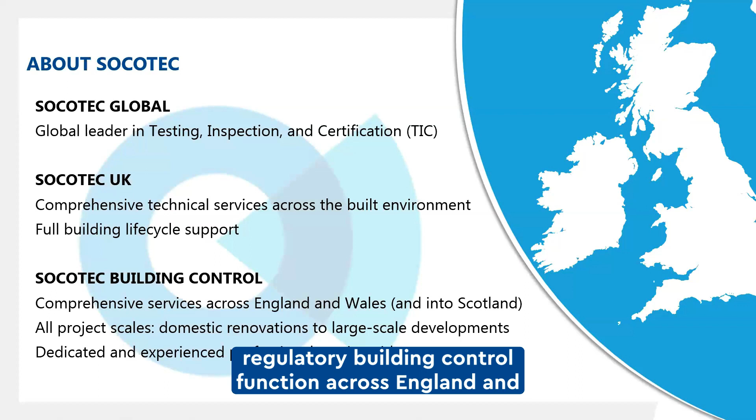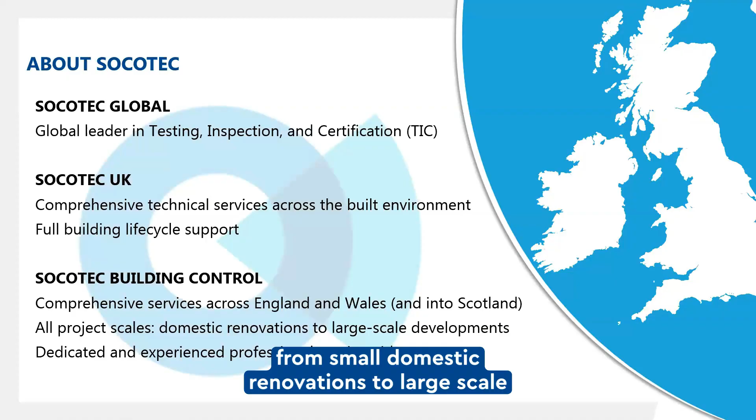At Socotec Building Control, we provide a comprehensive regulatory building control function across England and Wales, working with clients, designers, contractors and developers, providing oversight on projects of all scales, from small domestic renovations to large-scale commercial and residential developments. We also provide additional services, working as part of the multidisciplinary teams with the Building Safety Regulator, and in other sectors such as the Ministry of Defence and Ministry of Justice, reaching beyond England and Wales into Scotland. Our team of dedicated professionals operate nationwide, bringing extensive expertise and a risk-based approach to building control oversight.

Here's what we'll cover today. We'll begin by understanding why Grenfell triggered such profound change, then move through the key legislative developments and the current regulatory framework. We'll examine the various roles within the new system, focusing solely on non-HRB projects. We'll then discuss the fundamental shift in building control's role and the new registration requirements for building control professionals. Finally, we'll focus on practical guidance for effective engagement and how you can proactively demonstrate compliance. We'll conclude with a live Q&A.

The Grenfell Tower tragedy on the 14th of June 2017, which claimed 72 lives, exposed fundamental failings in our building safety system. Dame Judith Hackitt's independent review, published in May 2018, concluded that the system was not fit for purpose. Her report identified a fragmented regulatory landscape, insufficient oversight, a race to the bottom on building standards, inadequate competence across the industry, and worryingly, a culture where non-compliance had become normalised. These findings necessitated nothing less than a complete overhaul of the building control system. While the focus has naturally been on high-rise residential buildings, the review's findings had implications for all building types, and the legislative response has affected projects across the board.

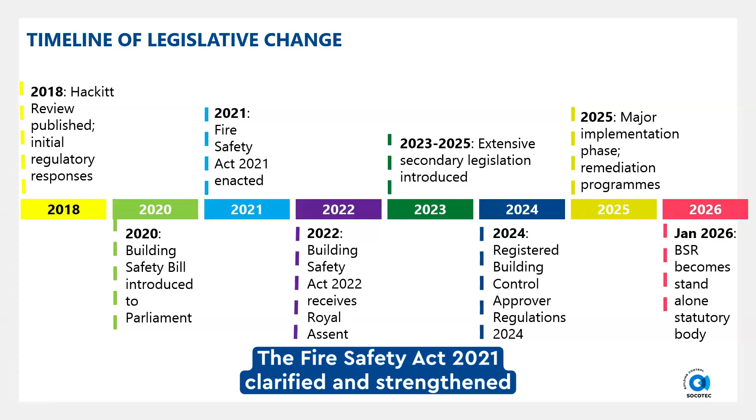The industry has seen significant change to legislation over the past few years. So let's take a look now at some of the key changes impacting the industry. We will start by looking at the timeline of change. Following the 2018 Hackitt Review, the government introduced the Building Safety Bill in 2020. The Fire Safety Act 2021 clarified and strengthened provisions under the Regulatory Reform (Fire Safety) Order 2005. The landmark Building Safety Act 2022 received royal assent in April of 2022, creating the legal framework for the new regime. From 2023 and into 2025, extensive secondary legislation was introduced to operationalise these changes.

In 2024, the Registered Building Control Approver Regulations 2024 came into force, fundamentally changing how private sector building control operates. Throughout 2025, we saw major implementation and significant remediation programs for unsafe cladding. Most recently, on the 27th of January 2026, the Building Safety Regulator became an independent statutory body, moving from its previous position within the Health and Safety Executive. This represents a significant step towards establishing a unified construction regulator.

The Building Safety Act 2022 is the cornerstone of the new regime. While it introduced the specific higher risk building requirements such as the gateway system, mandatory occurrence reporting for safety issues, and mandatory digital record keeping known as the Golden Thread, it also brought changes affecting all building work.

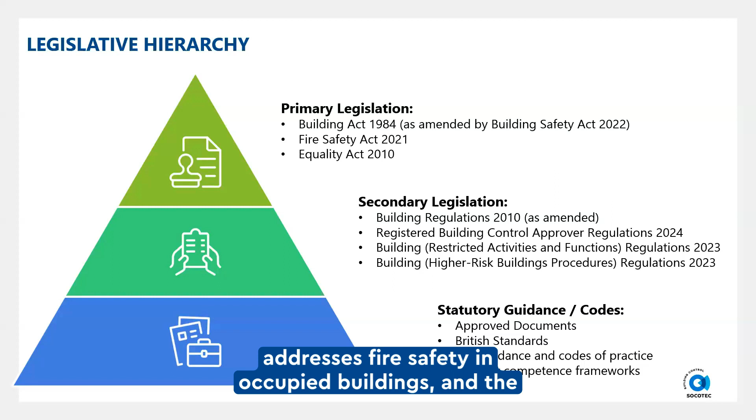Understanding the legislative hierarchy is crucial for compliance. At the top, we have primary legislation, Acts of Parliament. The Building Act, now amended by the Building Safety Act, provides the overarching legal framework. Other examples include the Fire Safety Act, which addresses fire safety in occupied buildings, and the Equality Act, which aims to protect people against discrimination based on protected characteristics.

Secondary legislation sits beneath this. The building regulations, which have been amended multiple times, set out the technical standards relating to building work and procedural regulations to be followed specifically for local authorities, whilst the registered building control approver regulations govern private approved bodies who carry out building control services and how they must operate, with other supplementary regulations such as the Building Restricted Activities and Functions Regulations expanding on measures introduced by the Building Safety Act.

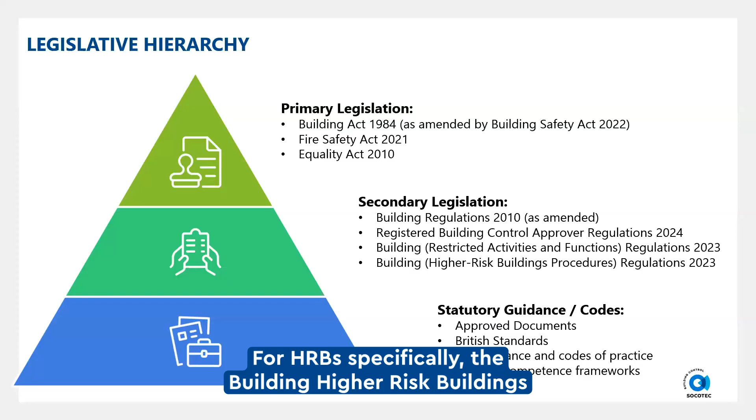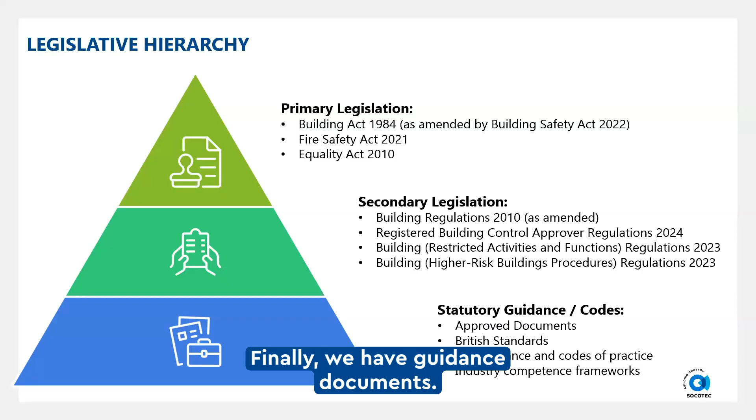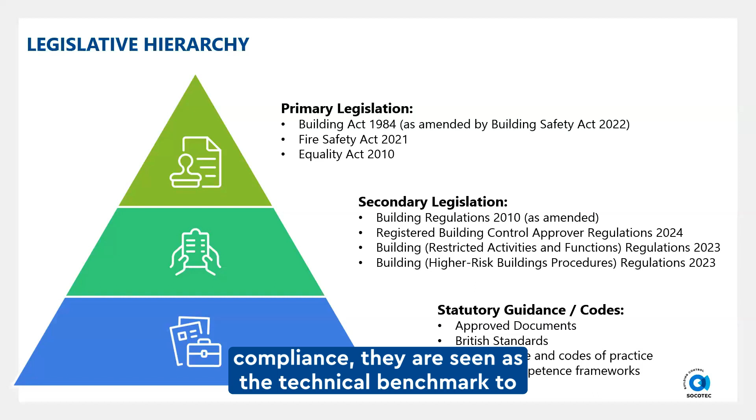For HRBs specifically, the Building Higher Risk Buildings Procedures Regulations detail the gateway process and other procedural requirements for buildings of this type. Finally, we have guidance documents. The approved documents provide statutory approved guidance on meeting regulatory requirements. And though they're not the only way to demonstrate compliance, they are seen as the technical benchmark to demonstrate compliance with functional requirements, supported by relevant British standards which are signposted as part of the approved guidance.

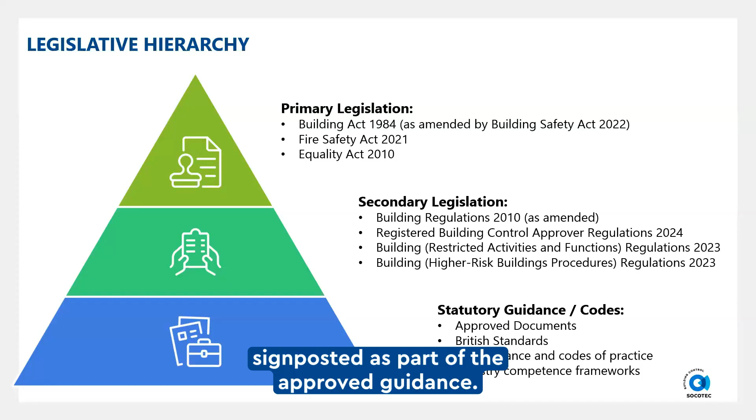The Building Safety Regulator issues its own guidance and codes of practice, and industry has developed competence frameworks to support practitioners and other similar guidance documents. A significant change brought in by the new legislation is regarding roles of those working within the construction industry and their responsibilities in relation to projects. Let's now spend some time reviewing these roles and responsibilities.

The Building Safety Regulator represents one of the most significant innovations in the new system. Initially established within the Health and Safety Executive in 2022, as of 27th of January 2026, it has moved to become an arm's-length body under the Ministry of Housing, Communities and Local Government. For higher risk buildings, the BSR has direct oversight through the Gateway Approval System. However, its role extends far beyond HRBs.

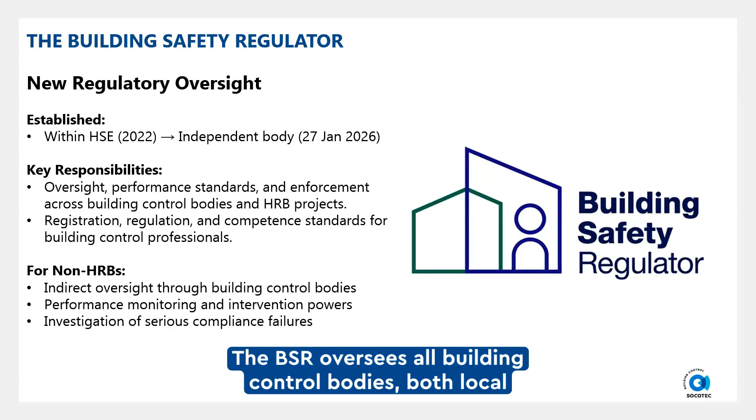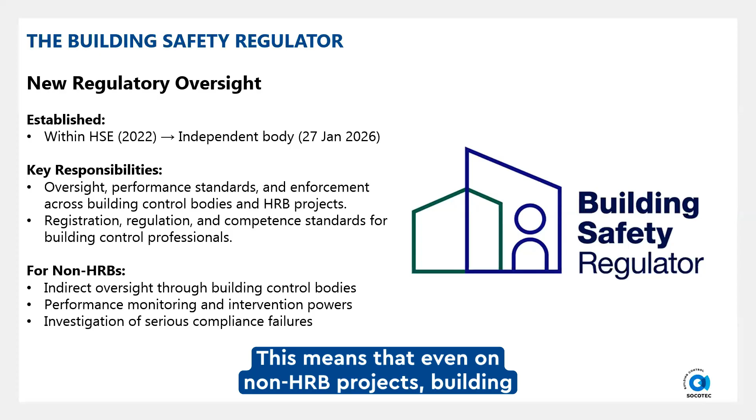The BSR oversees all building control bodies, both local authority and registered building control approvers. It registers and regulates building control professionals, sets performance standards, and holds enforcement powers. For non-HRB projects, which is our focus today, the BSR's oversight is indirect, but nonetheless significant. It monitors the performance of building control bodies and has intervention powers where serious compliance failures are identified. This means that even on non-HRB projects, building control decisions are now subject to greater scrutiny and accountability than ever before.

Now we move into the specific requirements for non-HRB projects, which will form the focus of the remainder of this webinar. The concept of duty holders is central to the new regime, and it's essential to understand who these parties are and what their roles entail. For non-HRB projects, the key duty holders under the building regulations are the client, who commissions the work, the principal designer for building regulations purposes, and the principal contractor for building regulations purposes. And as part of the building control process, these key duty holders are expected to make statements about the works and to confirm their specific duties have been undertaken.

In addition, any individual designers who may work under the principal designer and any individual contractors who may work under the principal contractor now have defined responsibilities as part of the building regulations. It's crucial to understand that the principal designer and principal contractor roles under the building regulations are distinct from the similar named roles under the CDM regulations. Whilst the same organisation may hold both roles, the responsibilities are different and serve different purposes. We'll explore this distinction in detail.

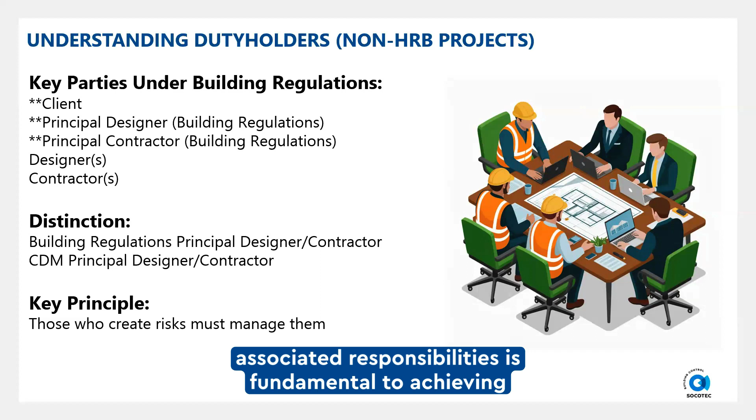The underlying principle applies across all projects. Those who create risk must manage them. Understanding your specific duty holder role and its associated responsibilities is fundamental to achieving compliance and owning responsibility. Let's focus on the client's role in non-HRB projects, as this often determines project success. As outlined in legislation, clients must ensure adequate time and resources are allocated for compliance. This isn't something that can be value engineered away, given that it is their legal duty.

Clients must appoint competent duty holders, including the principal designer and principal contractor, in order to satisfy the legislation, and information regarding duty holders will be required to complete the building control process. Critically, clients must ensure building control is appointed at a suitable point in the project, ideally before design work is concluded and certainly in advance of work starting on site.

This timely appointment is essential because building control's role is to oversee the process and should not be seen simply to rubber stamp completed designs. Clients must ensure coordination between all parties. Building projects may involve multiple specialists, and someone must ensure they are all working towards the same compliant outcome. Clients must maintain oversight of building control compliance throughout the project, not just at the end.

Documentation must be retained and should generally follow the golden thread principle to ensure the information can be used effectively to inform future development. Finally, clients must make suitable arrangements for managing changes, which are inevitable on most projects. The key question every client should ask is, do I have the right people doing the right things at the right time? If you can't confidently answer yes, you have a compliance risk.

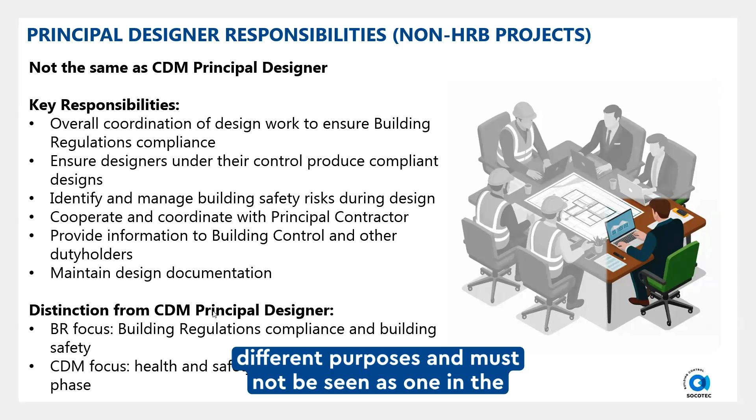Similar to the PD role, the principal contractor role under the building regulations is distinct from the CDM principal contractor. Again, the same organisation may hold both appointments, but the responsibilities differ. The building regulations principal contractor has overall coordination responsibility for construction work to ensure building regulations compliance. They must ensure that all contractors and subcontractors working under their control execute work in accordance with approved plans and specifications and comply with building regulations.

The principal contractor must manage building safety risks during construction, ensuring that what's being built will be safe for future users. They must cooperate and coordinate with the principal designer, particularly when site conditions or buildability issues require design modifications. Crucially, the principal contractor must liaise with building control regarding inspections and compliance verification. They must facilitate inspections, provide information, and ensure work is available for inspection at the appropriate stages. They must maintain as-built records and documentation, capturing any departures from the approved design.

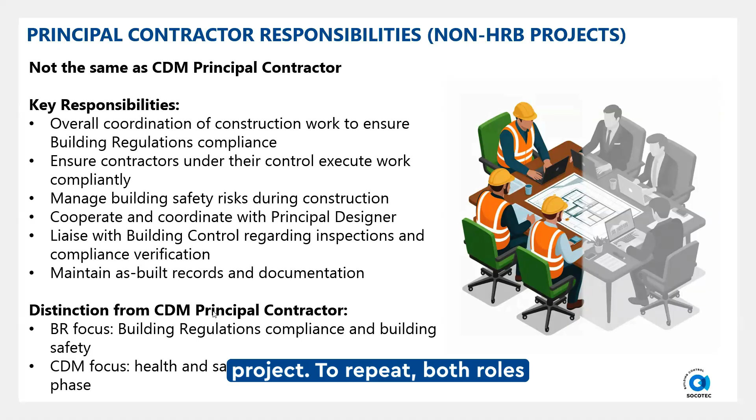The distinction mirrors that for principal designers. The Building Regulations Principal Contractor focuses on building regulations compliance and building safety for future users. The CDM Principal Contractor focuses on health and safety during the construction phase of the project. To repeat, both roles are essential. Both are legal requirements, but they address different aspects of construction safety.

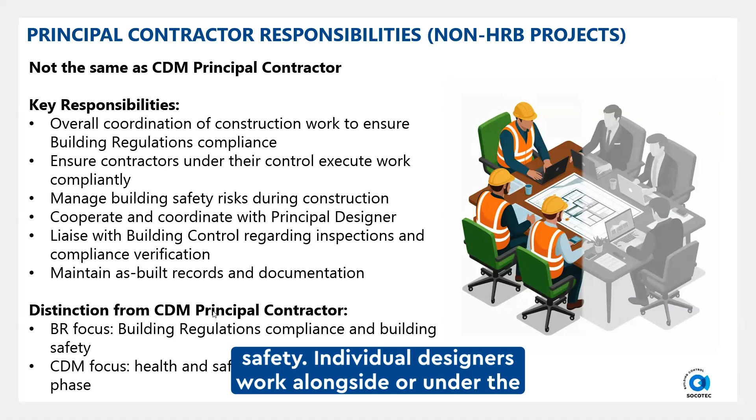Individual designers work alongside or under the coordination of the principal designer. The definition of designer is broad. It's anyone who prepares or modifies designs, or specifies materials, products, or systems. This includes architects, engineers, specialist subcontractors, and even contractors who make design decisions.

Individual designers must design to comply with building regulations from the outset. They must identify and manage building safety risks within their area of design responsibility. They must cooperate with the principal designer, providing information and responding to queries. Designers must provide adequate information for construction and for future use and maintenance of the building.

They must avoid specifying products or materials that are inadequate or potentially unsafe. The onus is on the designer to verify suitability, not simply rely on manufacturer claims. Crucially, designers must work within their competence, recognizing the limits of their knowledge and bringing in specialist input where needed.

The distinction between individual designers and the principal designer is important. Individual designers are responsible for their specific design contributions and must ensure these comply. The principal designer has the overarching coordination role to ensure all design elements work together compliantly.

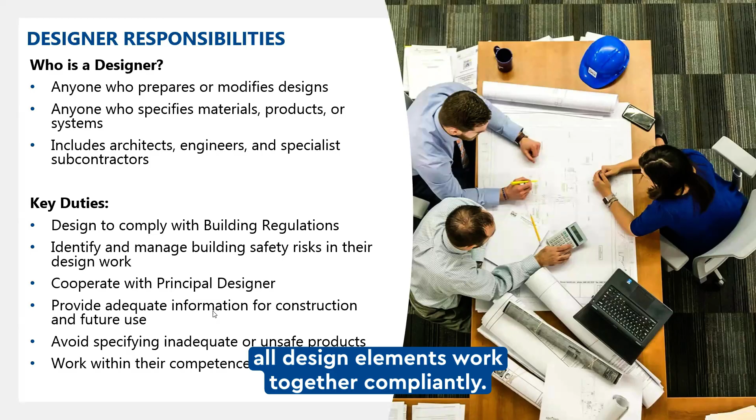Individual contractors work alongside or under the coordination of the principal contractor. Their responsibilities on non-HRB projects are significant and have been enhanced under the new regime. Contractors must execute work in accordance with approved plans and specifications. Variations must be properly managed and approved. They must ensure workers and subcontractors are competent for their tasks through verification, not assumption.

Contractors must follow building control inspection requirements, ensuring inspections occur at the right stages before covering up work. Contractors must report any safety concerns immediately, even if they're not responsible for the issue. Site records and as-built information must be maintained accurately. Contractors must cooperate fully with building control inspections, providing access and information as required.

Critically, contractors now have a positive duty to challenge non-compliant designs before construction. Simply following instructions is not a suitable defence if the work doesn't comply, and there was an opportunity to flag the issue. Contractors must work within their competence, recognising when specialist input is needed. The principle of the right to stop means contractors must not proceed with work they know or suspect to be non-compliant, even if instructed to do so.

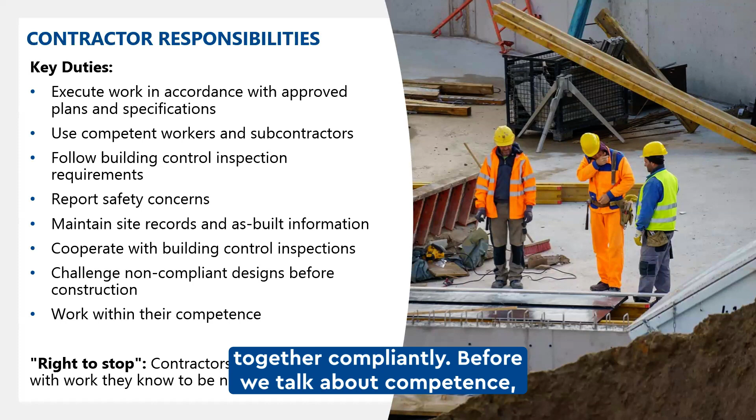Before we talk about competence, can I make this absolutely clear? Ensuring competence is the responsibility of duty holders, not building control. Clients must ensure the competence of everyone they appoint. In essence, the principal designer and principal contractor. The principal designer must ensure the competence of designers working under their coordination. And the principal contractor must ensure the competence of contractors and specialists undertaking the work.

Building control's role is not to routinely assess or verify competence of duty holders. That's not what the risk-based approach is about. However, where it becomes apparent that competence is not evident, perhaps through poor quality submissions, fundamental misunderstandings of requirements, repeated errors, or the inability to demonstrate compliance adequately, this will form part of the necessary risk assessment building control are expected to undertake.

If there is an apparent lack of competence identified, building control must respond through heightened scrutiny because incompetent work presents higher risk. This isn't building control overstepping its remit, it's applying the risk-based approach appropriately. The solution is not to challenge building control's assessment, but to address the issue that led to competence being in doubt. It's important to understand that competence isn't just technical ability.

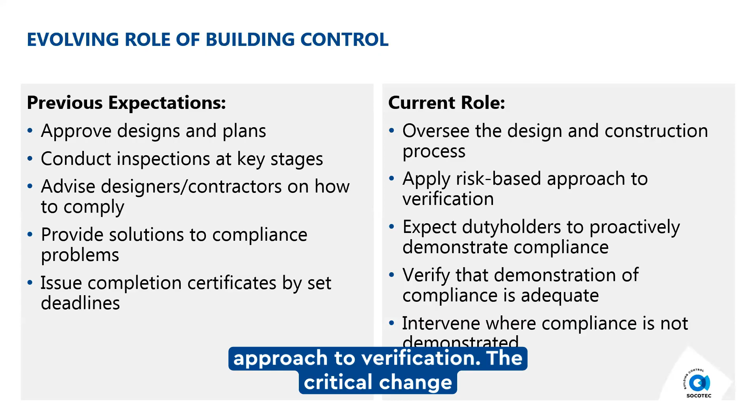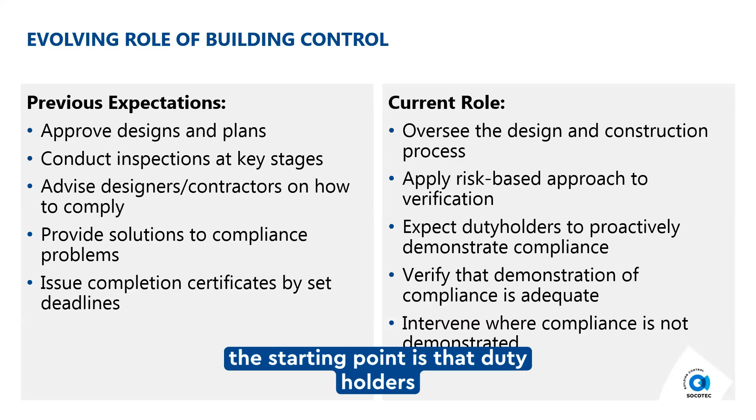The new regime represents a fundamental shift. Building control now oversees the design and construction process, applying a risk-based approach to verification. The critical change is this: duty holders are now expected to proactively demonstrate compliance. Building control's role is to verify that this demonstration is adequate, not to create the demonstration itself or to fill in gaps. Where compliance is not demonstrated, or where the demonstration is inadequate, building control should intervene. But the starting point is that duty holders must show they comply, not ask building control how to comply, or to reassure duty holders their work does comply.

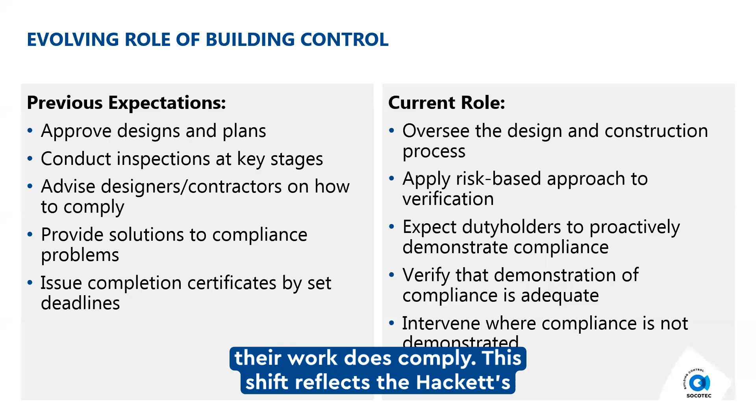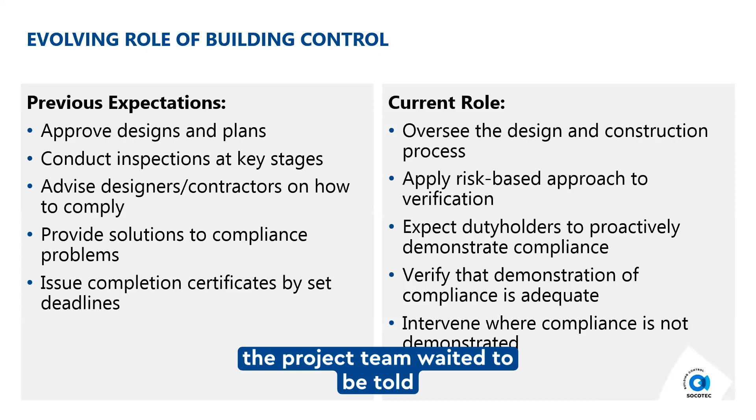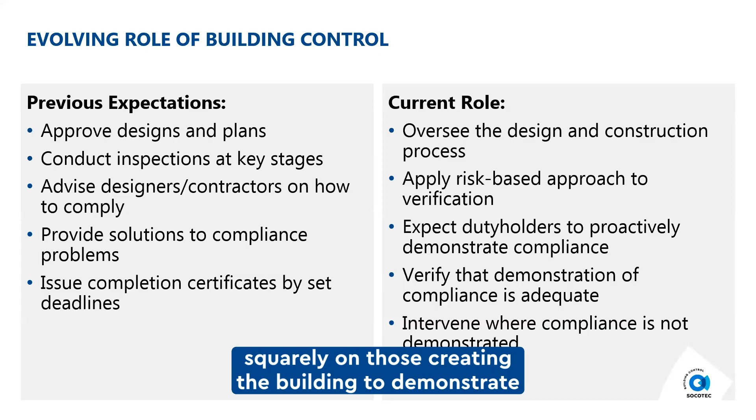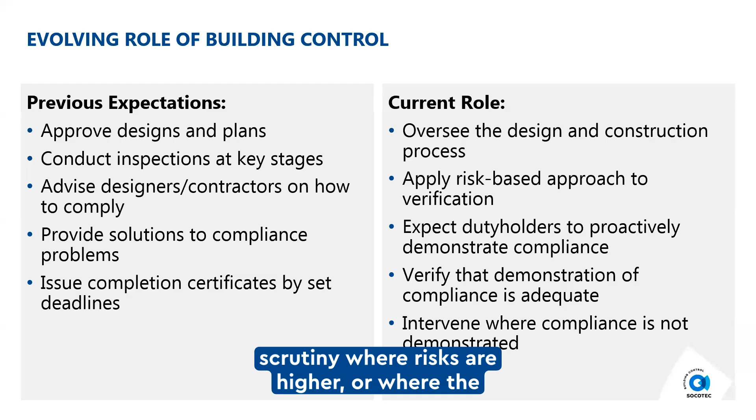This shift reflects the Hackitt Review finding that the previous system created a culture of dependency, where those in the project team waited to be told what to do rather than taking ownership of compliance. The new regime places responsibility squarely on those creating the building to demonstrate it meets the required standards. Building control verifies this demonstration through a risk-based approach, applying greater scrutiny where risks are higher or where the demonstration appears inadequate. Let's review this new approach in more detail.

The risk-based approach means building control tailors its verification activities according to the risks present and how well compliance is demonstrated. Building control applies greater scrutiny where building complexity is higher, where fire safety or structural risks are more significant, where novel or innovative approaches are proposed that lack established performance, where competence appears inadequate, where there's a history of previous non-compliance, or where documentation is poor or incomplete.

Conversely, where risks are lower and compliance is clearly and comprehensively demonstrated, building control applies a proportionate verification approach. This means focused inspections on critical elements rather than exhaustive checking of every detail, and reduced administrative burden on duty holders who demonstrate strong compliance management. The principle is straightforward. Demonstrate compliance early and comprehensively, and building control scrutiny will be proportionate to the actual risk. Fail to demonstrate or demonstrate poorly, and scrutiny increases. This creates a positive incentive for duty holders to invest in clear documentation and proactive compliance demonstration.

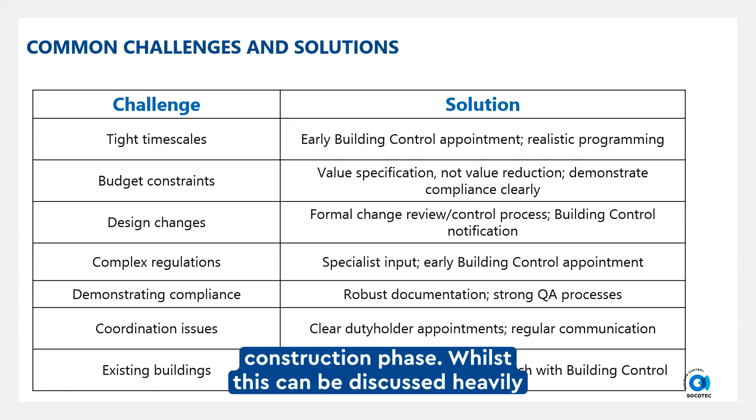Design changes occur on almost every project. However, duty holders should ensure they have suitable processes to formally review and control any design changes, particularly those that occur during the construction phase. Whilst this can be discussed heavily by the project team, duty holders should ensure building control are notified of these changes, ensuring suitable demonstration of compliance.

Complex regulations can be overwhelming. Bring in specialists' input for specialist aspects, and appoint building control early enough that they understand your project's compliance approach. Demonstrating compliance effectively requires robust documentation and strong quality assurance processes proportionate to the size and complexity of the project. These should not be viewed as optional extras, but as fundamental requirements. Coordination issues between duty holders are best addressed through clear duty holder appointments with defined responsibilities and regular communication between all parties.

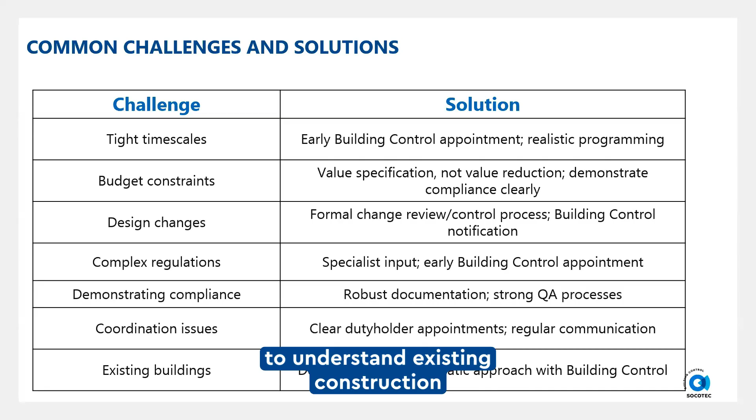For projects involving existing buildings, such as refurbishments, fit-outs, change of use, extensions, detailed surveys to understand existing construction, and a pragmatic approach working with building control to demonstrate proportionate compliance solutions achieves better outcomes, rather than ignoring existing conditions or assuming non-compliance can be hidden or simply ignored. Remember, the fundamental shift is that you demonstrate compliance. Building control verifies. Make demonstration your priority and verification becomes straightforward.

One of the reminders for duty holders is the need to appoint building control much earlier than they may have done in previous projects. Building control must be appointed before building work starts, and risk can be mitigated where the appointment is made before design work is fully concluded. Why is early appointment so critical? Because building control oversees the process of design and construction, and leaving it until the final design is ready could result in delays, as sufficient time will be needed to review the design.

Whilst designers should not rely on building control to tell them the design is compliant, engaging with building control to demonstrate the approach to compliance can give sufficient reassurance and make the verification process easier for the registered building inspector allocated to the project if they have an understanding of the design steps taken throughout the project. The risk-based approach requires building control to understand how designs have developed and how compliance is being demonstrated throughout the project, not just at the point of submission.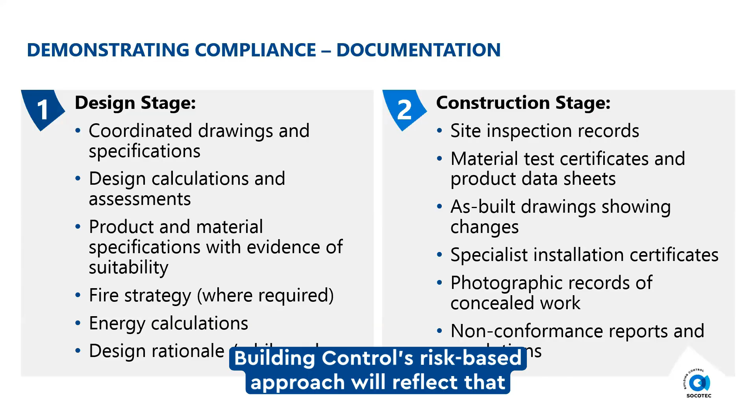This documentation informs your demonstration of compliance. The more complex the project, the greater level of documentation required. Remember, the fundamental shift: you demonstrate, building control verifies. If your documentation is comprehensive, clear, and demonstrates compliance effectively, building control's risk-based approach will reflect that through proportionate verification. If documentation is poor, incomplete, or unclear, building control must apply greater scrutiny because you haven't adequately demonstrated compliance.

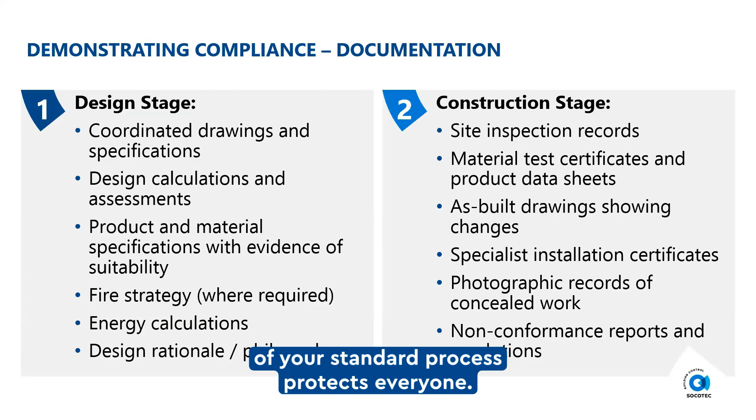The extended limitation periods mean documentation you create today might be examined many years later. Making comprehensive documentation part of your standard process protects everyone. While documentation forms the foundation of compliance demonstration, it must be supported by robust quality assurance processes. Effective QA includes regular design reviews and coordination checks, catching clashes and inconsistencies before they reach site. For complex elements, independent technical review provides a second pair of expert eyes and demonstrates professional rigor.

On site, quality control plans and checklists ensure consistent standards. Inspection and test plans ensure verification occurs at the right points in the construction sequence. Subcontractor management and verification processes ensure quality isn't just assumed, but checked. Change control procedures ensure modifications are properly assessed and approved. And critically, learning from defects and near misses, treated as opportunities for improvement rather than embarrassments to be hidden.

From building control's perspective, when we see strong quality assurance processes, we have confidence that compliance is being actively managed and demonstrated, not hoped for. This confidence directly influences the risk-based approach, where duty holders demonstrate effective compliance management through robust QA. Building control can apply proportionate verification focused on key risk areas. Conversely, when QA is weak or absent, building control lacks confidence in the demonstration of compliance and must compensate through more intensive scrutiny. Strong QA processes are not an additional burden, they're an investment in demonstrating compliance effectively and facilitating efficient building control oversight.

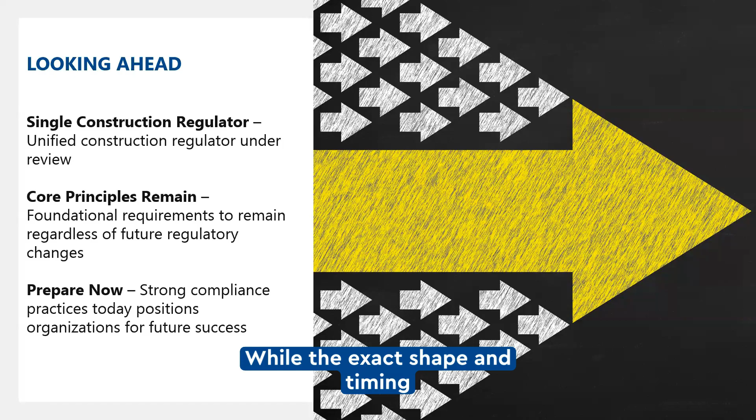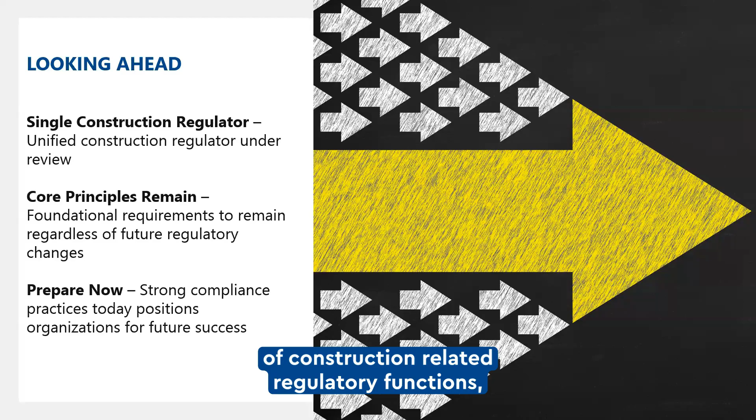While the exact shape and timing of any unified regulator remains to be confirmed, the direction of travel is clear, toward greater integration of construction-related regulatory functions, enhanced accountability across the sector, and more consistent oversight of competence and compliance.

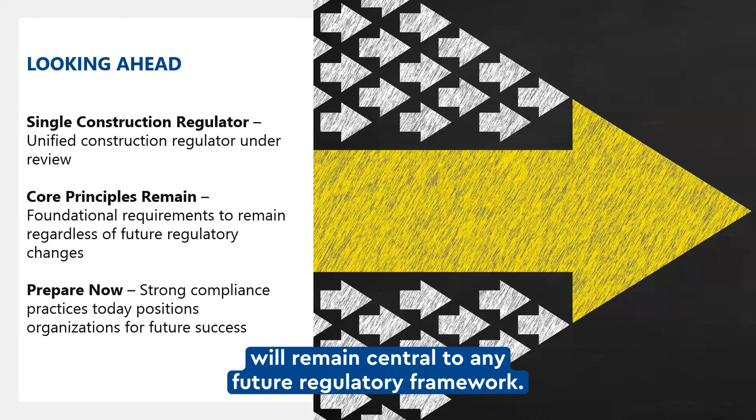What we can say with certainty is that the fundamental principles we've discussed today, duty holder responsibility, proactive demonstration of compliance, competence verification, and robust documentation will remain central to any future regulatory framework. These aren't temporary requirements, they represent a permanent shift in how the industry approaches building safety and compliance.

For duty holders, the best approach is to embrace these principles now. By building strong compliance demonstration practices, maintaining comprehensive documentation, and engaging proactively with building control, you're not just meeting today's requirements, you're preparing for tomorrow's regulatory environment, whatever form it may take.

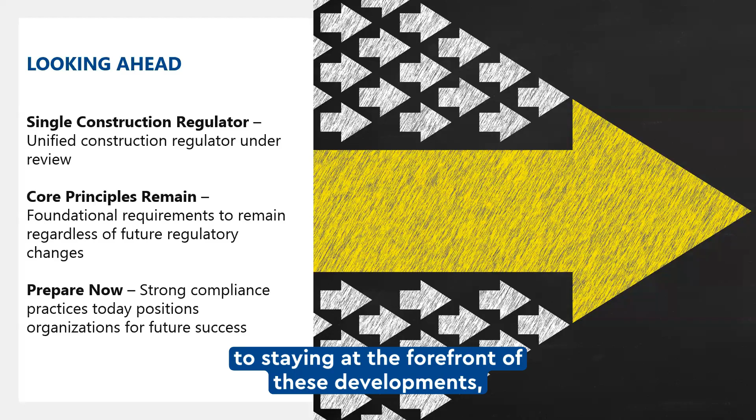The regulatory landscape has changed significantly, but with the right approach, early building control appointment, clear and proactive demonstration of compliance, robust documentation, and collaborative engagement, you can navigate these changes successfully and deliver safe, compliant buildings efficiently.